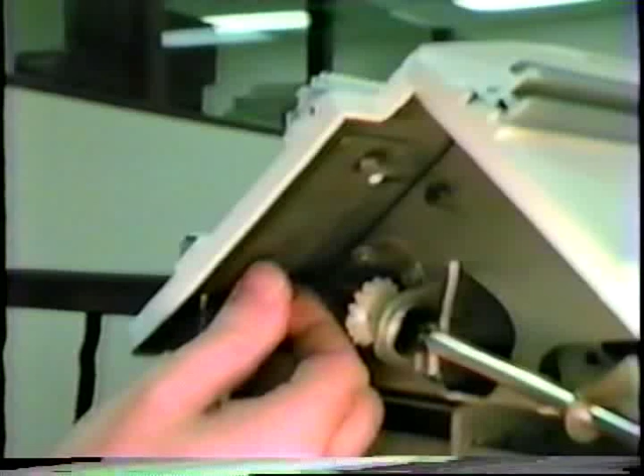Screw the knurled nut in place. This is the same type of nut used as with the 4-color changer. Only tighten this up to the outer edge. It will not tighten to the shoulder, as was the case with the 4-color changer.

Now tighten the upper knurled nut, the small one. Be very careful here. Make this firm but not too tight. Be very careful not to twist off the bolt underneath.

Place the Electra on the 2 angular brackets on the stand, slide sideways. These are your openings for fitting on the angular bracket.

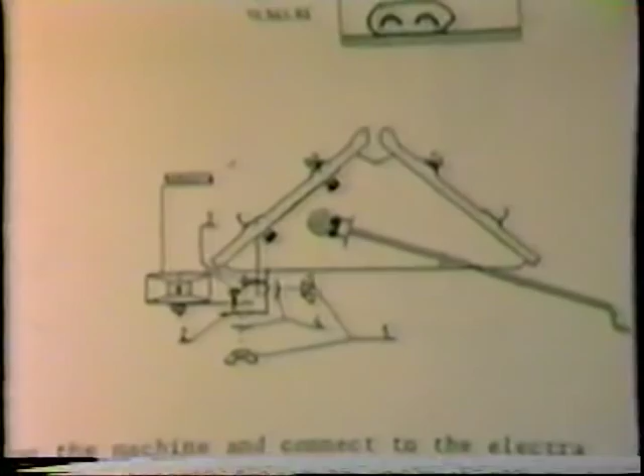We now want to fasten the racking angle bracket, shown here as number 2. Also notice the washers, shown as number 4. It's very important they go on in the angle shown in the drawing.

The racking angle fits into place. Be sure that it's secure. Then slide the screws down through.

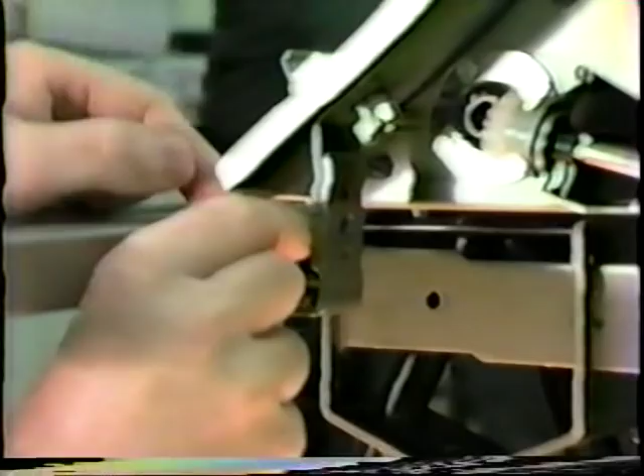Now do the same thing up above. We slide in the screw. We put the washer in place. We now add the wing nut. You may want to get a pair of pliers and make sure these are absolutely tight.

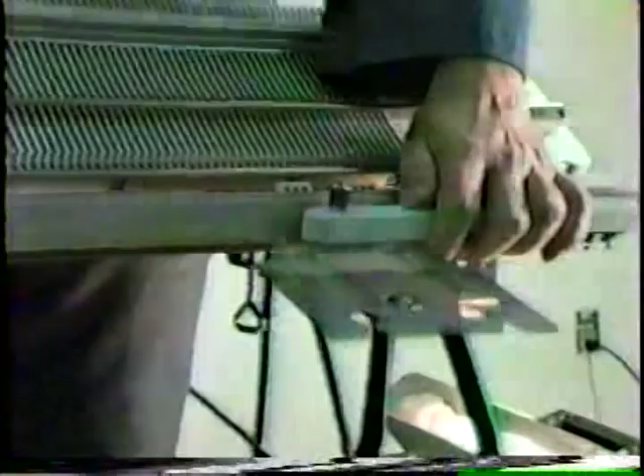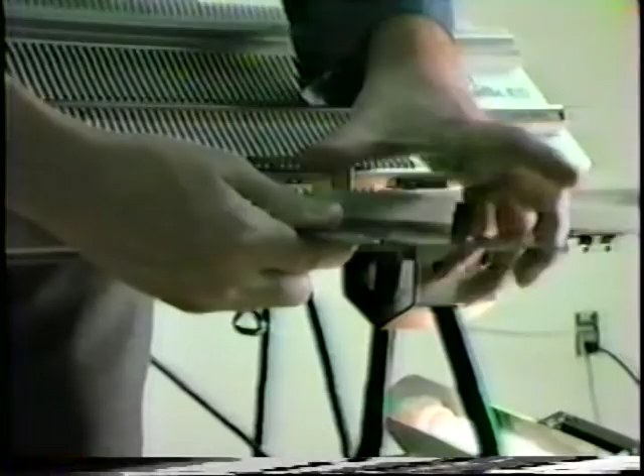We are now ready to fit the support for the mast onto the Electra 3000. Put the special hexagon screw through the spacing bush and loosely fasten with a wing nut. Then we're going to push the upper part of the hexagon screw through a hole on the underside of the main carrier rail, and we're going to slide it into place.

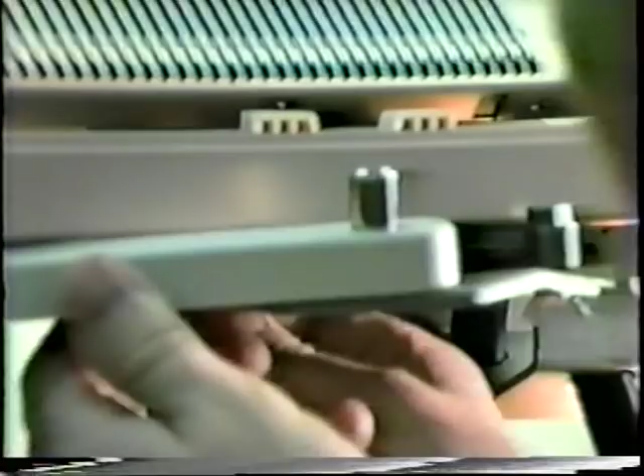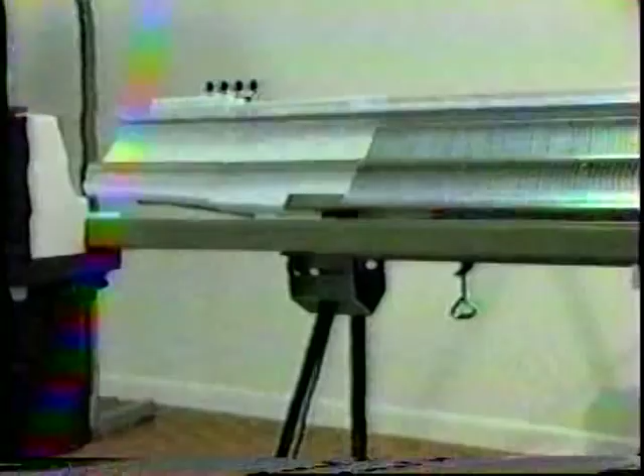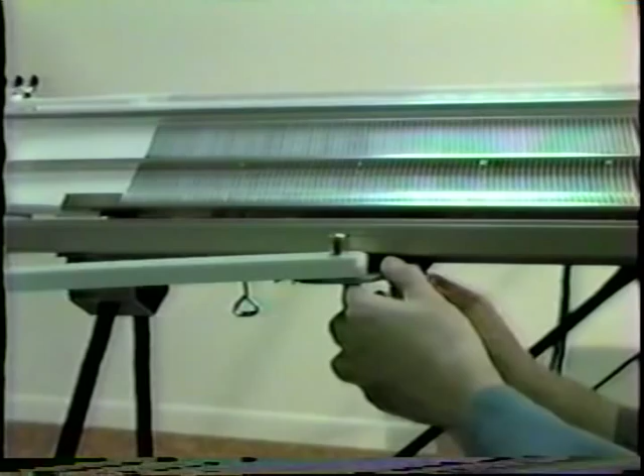Slip the head of the hexagon screw up through. The edge of the color twin support should be approximately even with the edge of the blocking rail. Now fasten it securely in place by tightening the wing nuts.

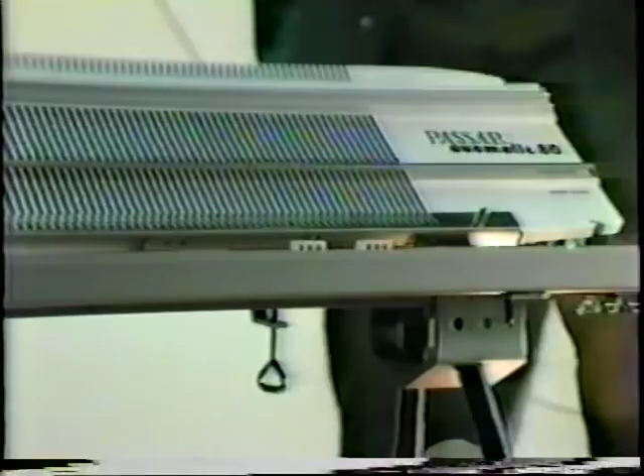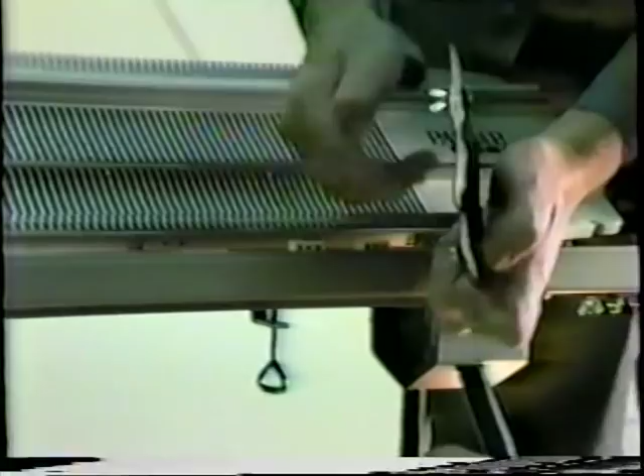Here we have the form computer support foot. Use the small hexagonal bolts for this. Slip them through, fasten the wing nuts in place, and slide the heads through the holes on the underside of the main carrier rail.

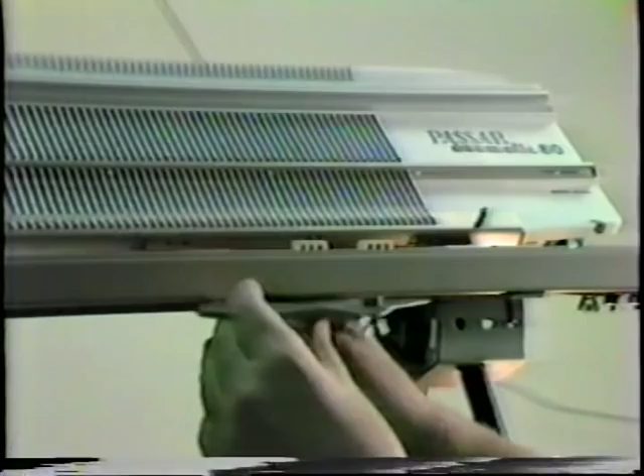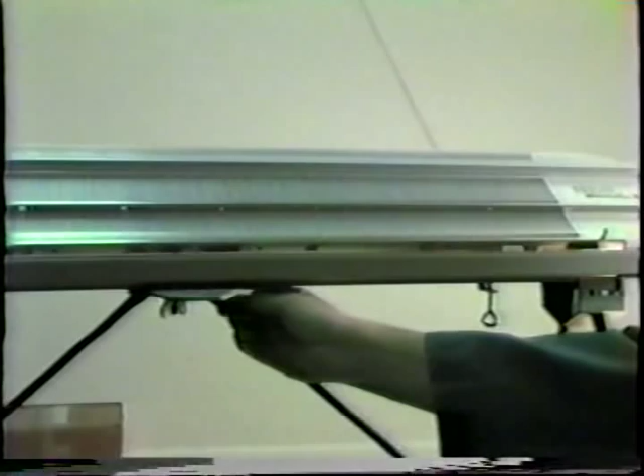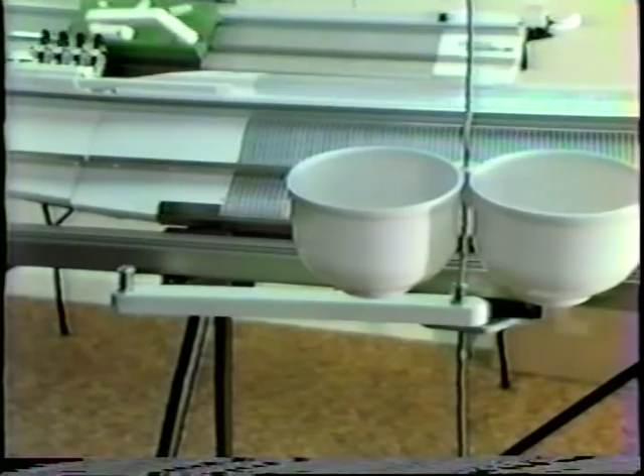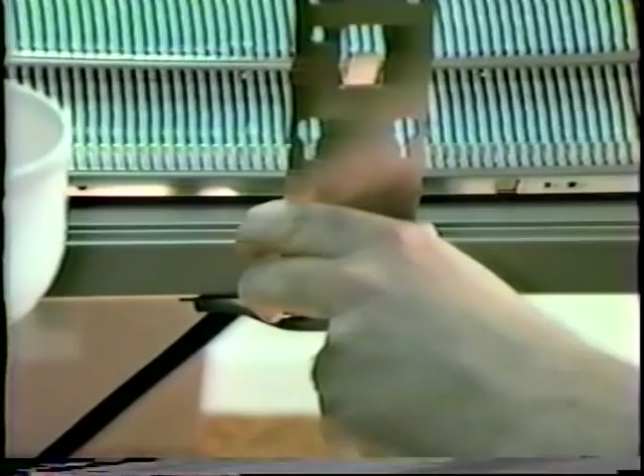Slide the support foot into place. Tighten down the wing nuts. You can position this approximately in the middle of the bed. You can put your tension masts back in. Reattach the form computer holder.

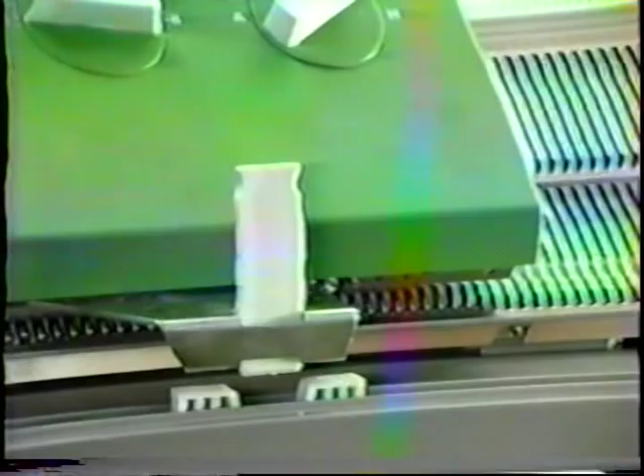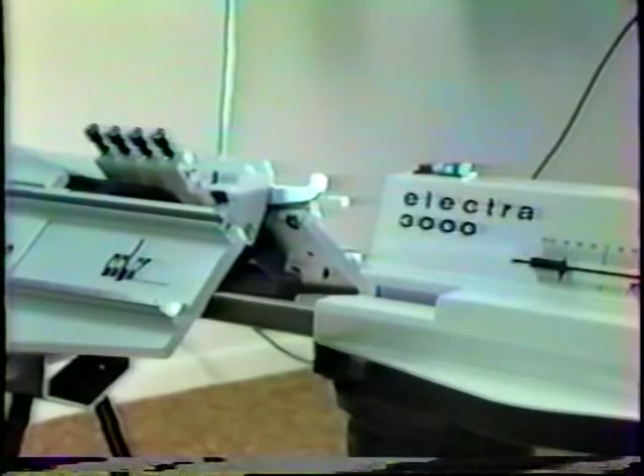When you're ready to engage the Electra, you press the slider into the clutch on the toothed belt; pull out to disengage. To put in the control bar, simply push in till it clicks into place.

This is the illustration for mounting your new form computer driver that will hold the magnet. Note that the screw and the nut are furnished with the form computer, not with the Electra. This is the same screw that was used to hold the stiffening plate that had to be removed before.

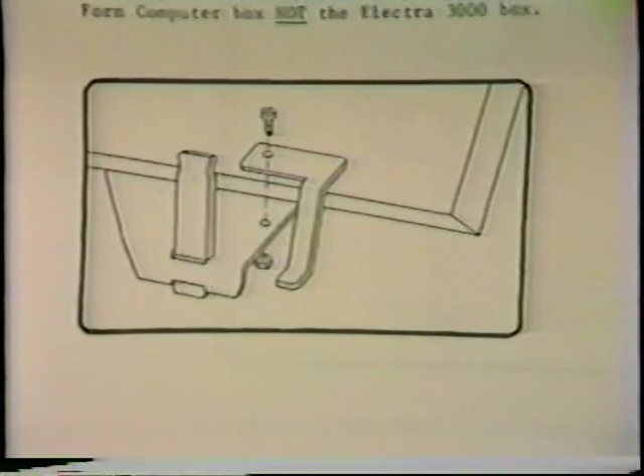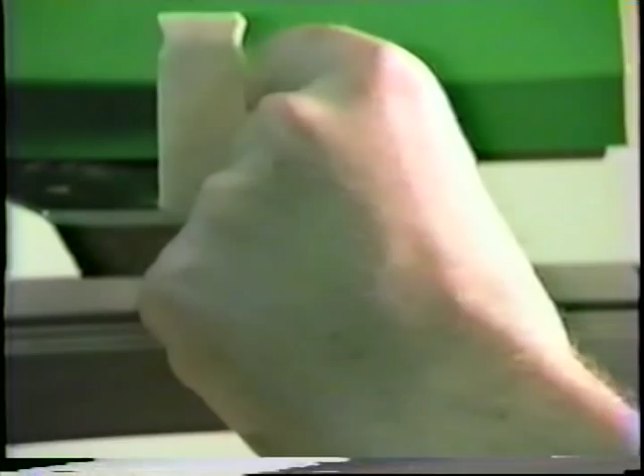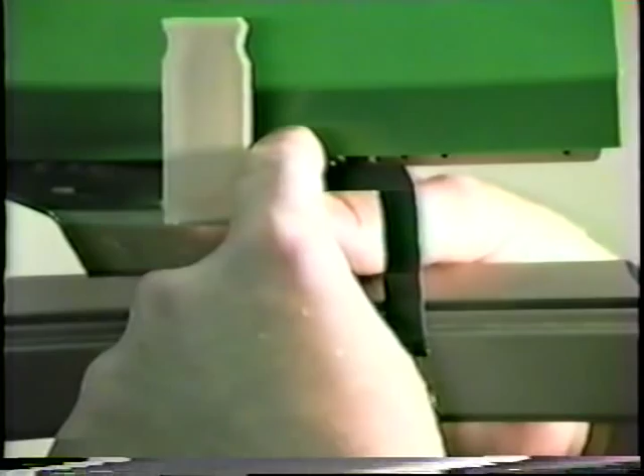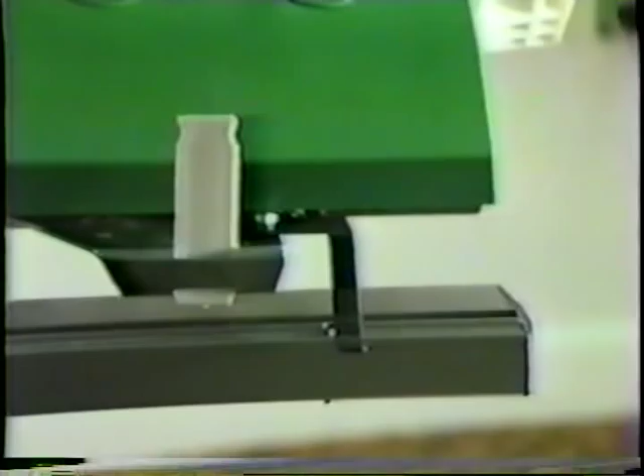Make sure that the indentations in the driver fit securely into the bracket. Push the screw down through and fasten the nut. You may need to use a wrench on the nut to hold it steady while you tighten down the screw. It may be easier for most of you to take the cam box off the beds to do this assembly. The magnet simply clicks on in place.

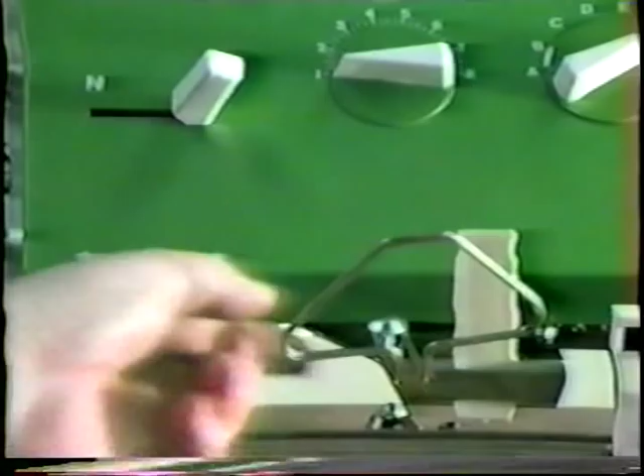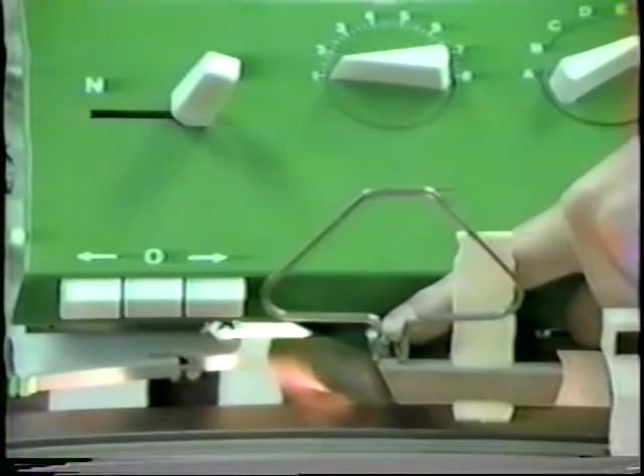This is the assembly of the trip wire to the cam box in the back. You'll be using the flat-headed screw and the spring washer and the wing nut. Before tightening the wing nut, pull the trip wire toward you. Pull it to the stop of the two slits in the driver for the cam box. You may also want to take the cam box off the beds to do this assembly.

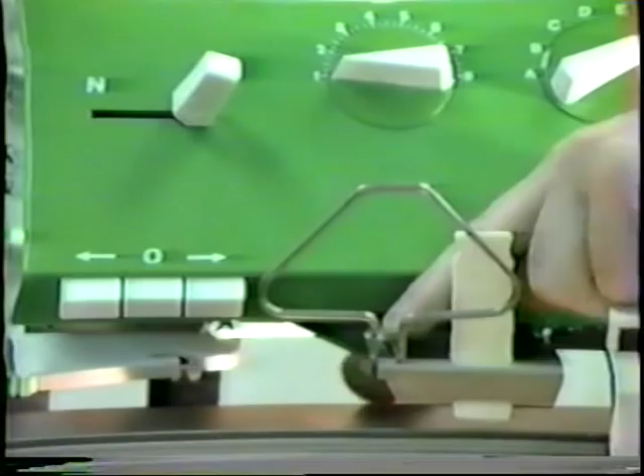This is the support foot for the counter for accessory 2. Assemble the support foot to the Electra with the two special hexagon screws and the two wing nuts. Make sure that the supporting foot is positioned approximately in the middle of your knitting machine. Unless the form computer is in your way; in that case, it will just have to sit next to it.

Unscrew the two knurled nuts on the counter for accessory 2, insert the counter into the support foot, and screw on with the two knurled nuts. Fasten the knurled nuts with the screwdriver.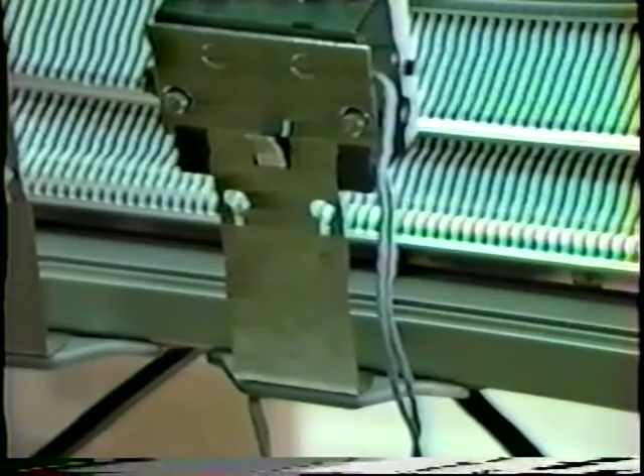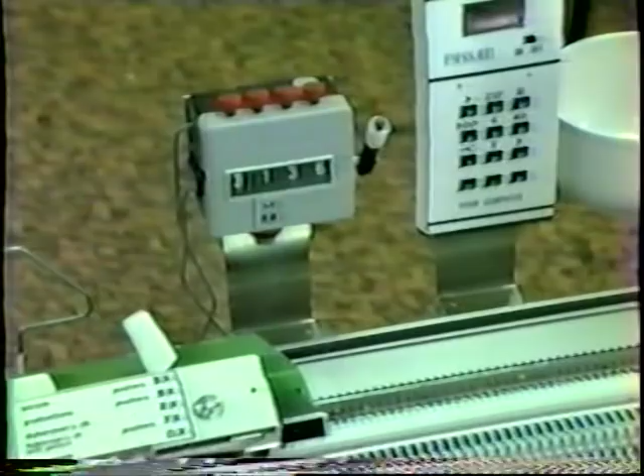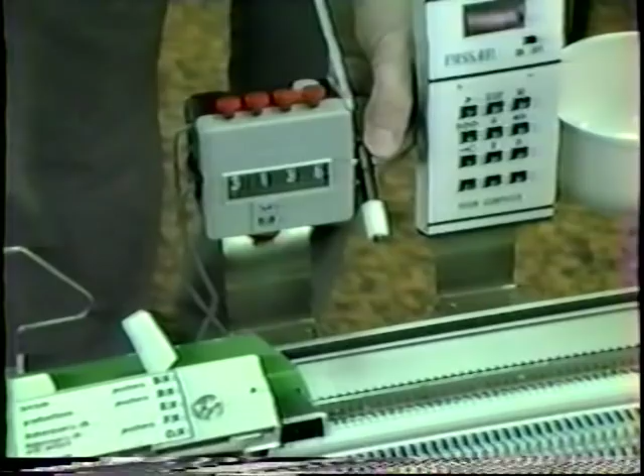Adjusting the counter lever. Take a screwdriver, loosen the back of it. Lower it to approximately the point you think it needs to be at. Tighten the screw in the back.

Run the cam box back and forth. The trip wire should lift it high enough to advance the numbers in the display, but should not put undue pressure on the counter and force it to push back extremely hard.

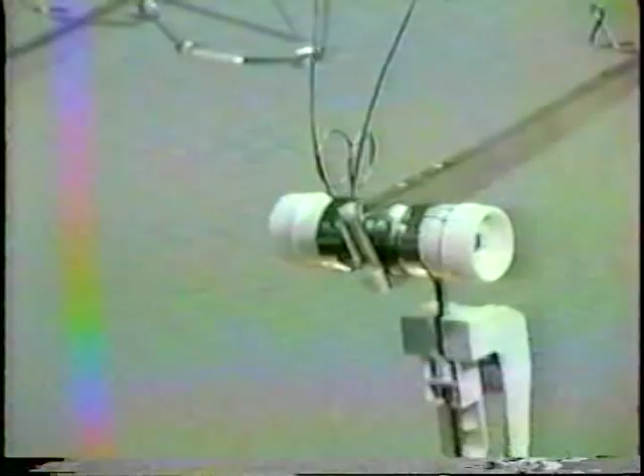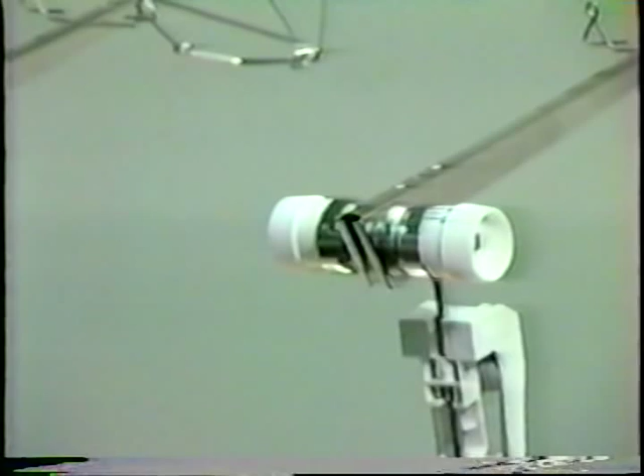Notice the white holder of the tension arm. If this does not have holes in it, we need to put in one that does. Here you see the difference. The one on the right, I've outlined the holes in black. This is a new one. The one on the left has no holes in it, and it would need to be replaced so it was like the one on the right.

Simply push down and it will snap off. Take the new one and you can use the table for leverage. Push down onto the antenna. Do both sides. Make sure it's secure.

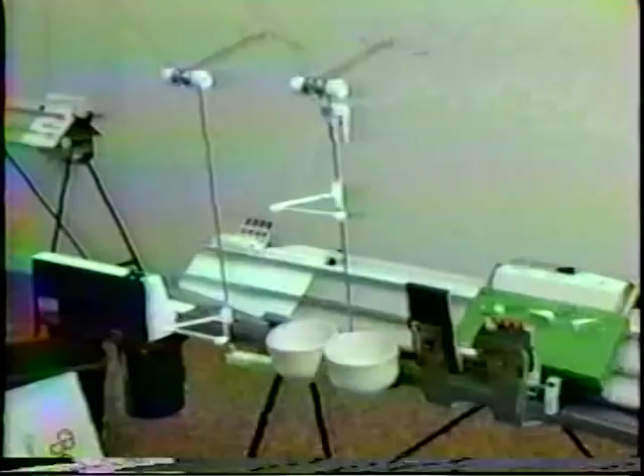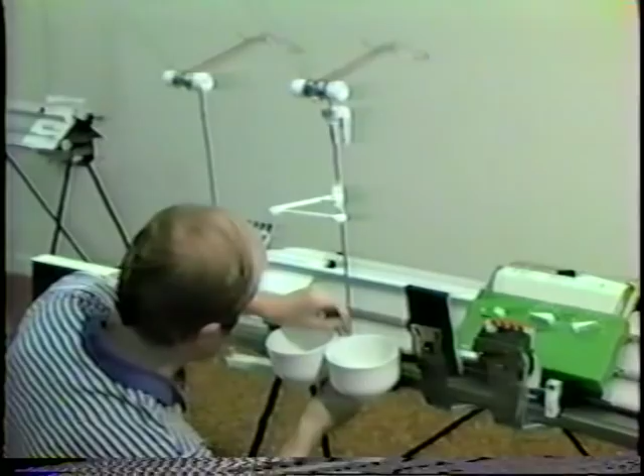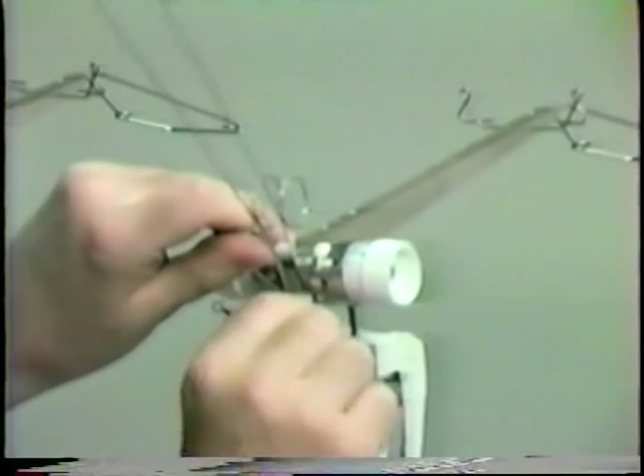Run the end of the connecting cable up through the yarn bucket support. Pull it up through the opening in the yarn guide. We are now going to fasten the shorter wire of the connecting cable in the lower hole. Do this in the following order. First, the contact strap, then the shorter cable, then the washer, and then the lens head sheet metal screw.

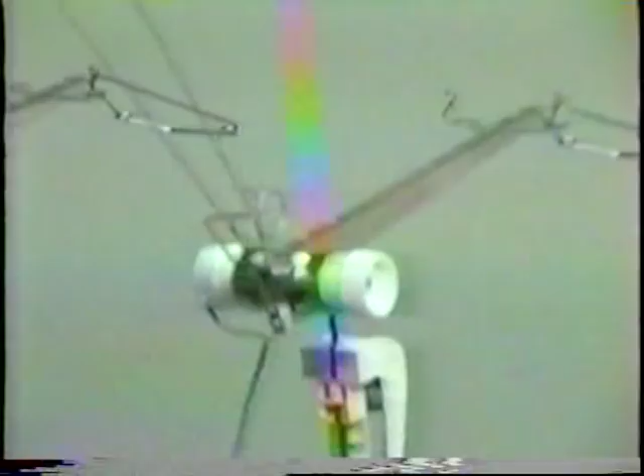Now we'll fasten the longer cable in the upper hole in the following order. The longer cable, then the washer, and then the screw.

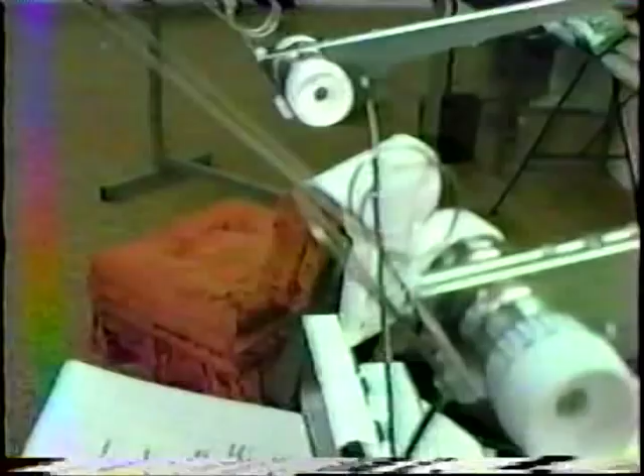Bend the contact strap back so that you have the distance of 3 to 5 millimeters between the tension arm and the contact strap. Here you see it better from another angle. To help keep the connecting cable from getting entangled with the yarn, and also to keep the contacts of the connecting cable from breaking off, it's advisable to take a piece of tape and tape the connecting cable to this part of the mast.

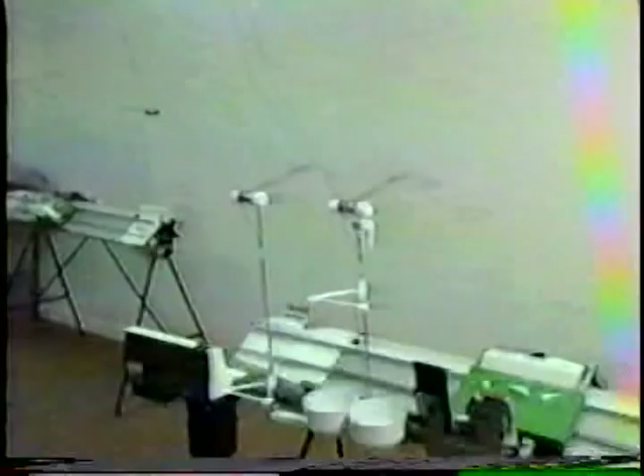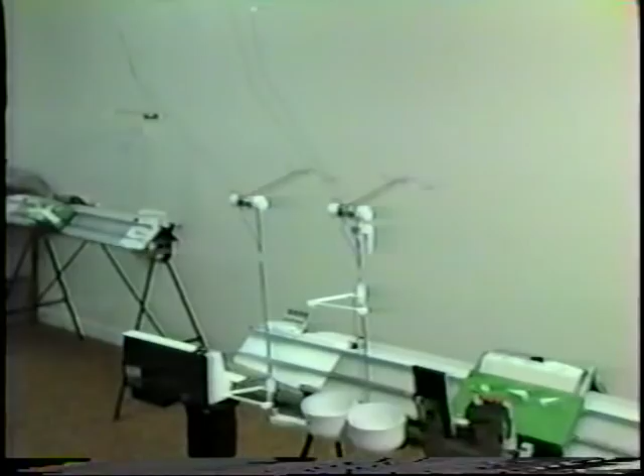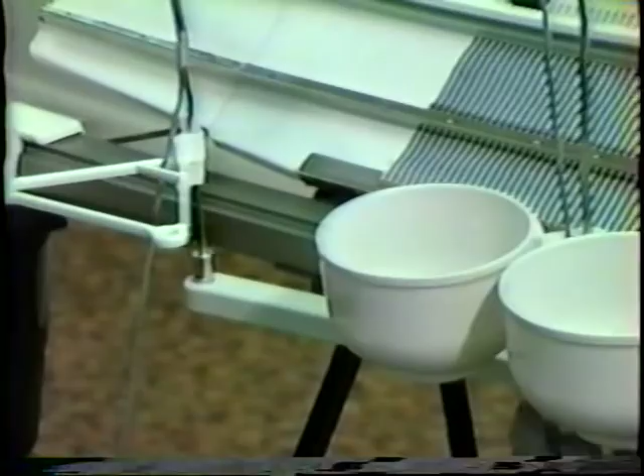You have 3 cable clips to hook the wires out of the way on the underside of the main guide rail. Just simply slip it into the notch underneath and clip them into place. Here you see an underside view of the cable clips and how they can clip the wires in place.

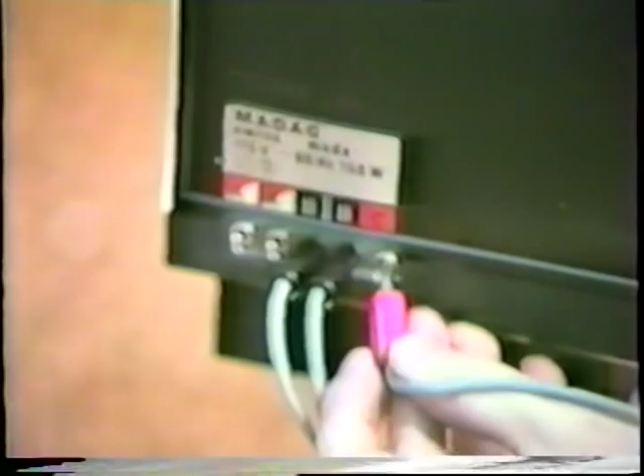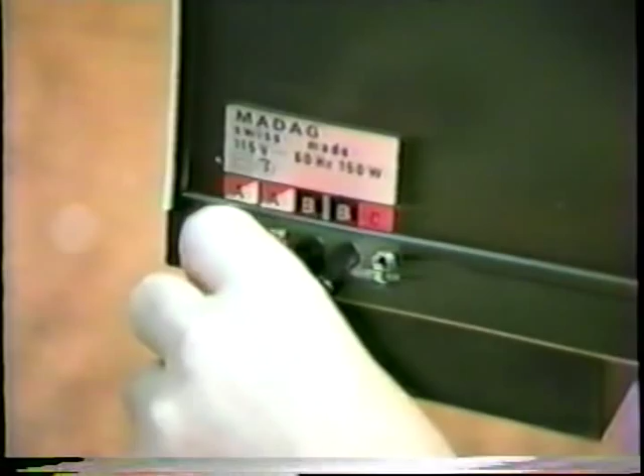The black plugs will fit into the B slot. The red you can put in the C. The gray will fit in the A. Depending on what application you want to use with the accessory counter, you can put the red in the A slot also.

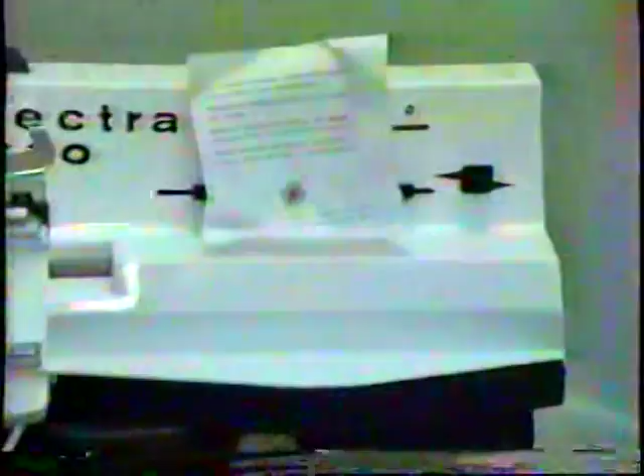Here's how you plug the foot pedal into the back of the Electra. Remember, your foot pedal is not a speed control. Before operating, always remember to remove the transport screw. Save this transport screw. Also give it to the customer who buys the Electra so they'll have it the next time they move it.

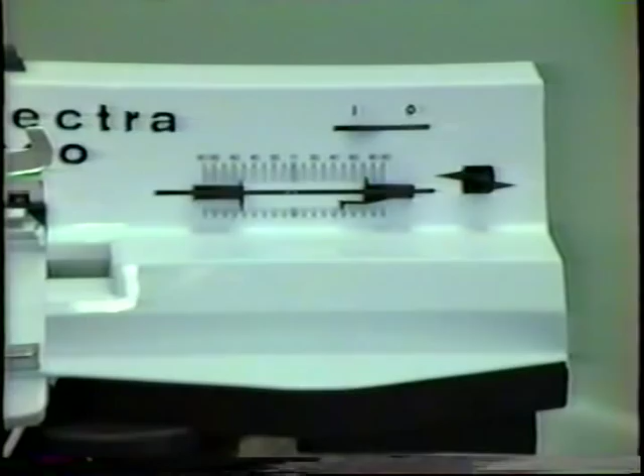One more time, you must have a Color 80 4-color changer in order to use the Electra 3000. Sometime in the future, there will be new mounting brackets for the Electra 3000. Right now we'd like to point out some of the new modifications that will be taking place so that you'll be aware of these when this happens.

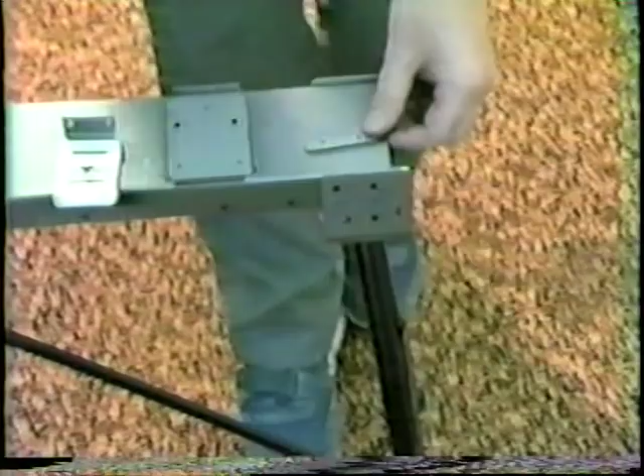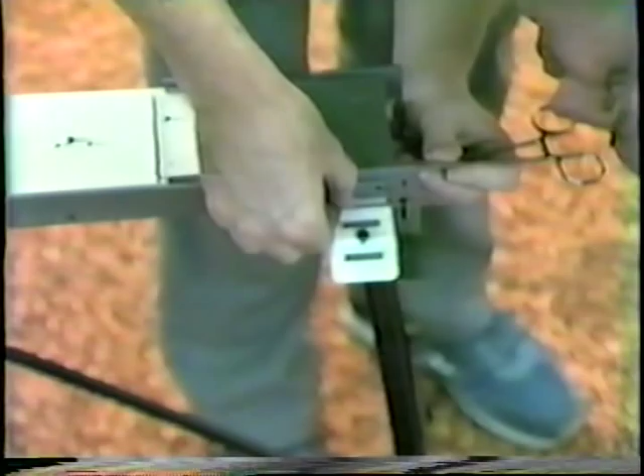The first change is the angular bracket that attaches to the stand. You will also have a fixing plate that slides into the stand. This time you'll be using 2 cylinder screws with a spring washer on each one to fit this angular bracket into place.

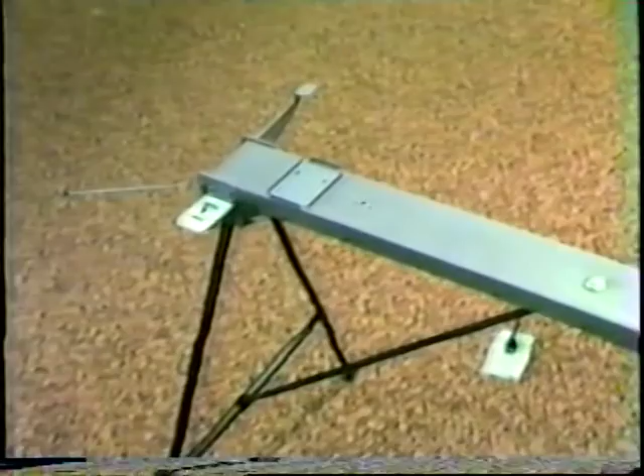Rather than the old mounting brackets on the extreme left-hand side, you will have a new racking plate. It will screw onto this part of the back bed in this position right here.

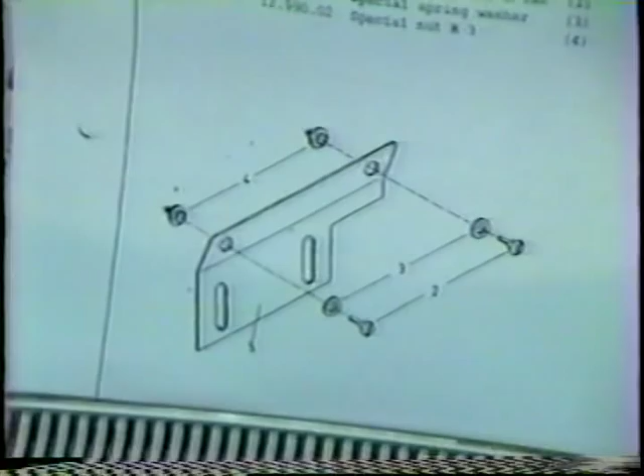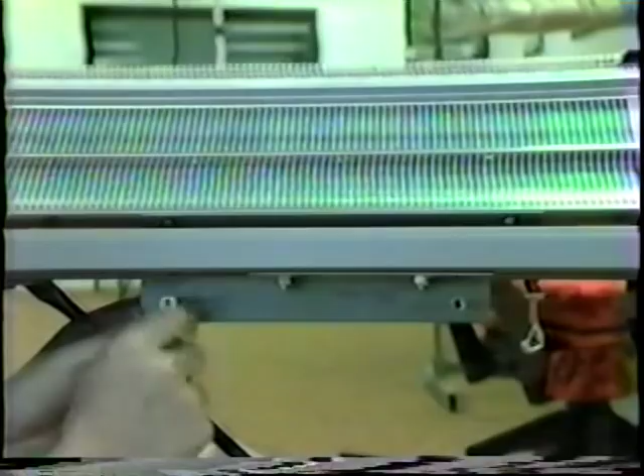Set the motor in place, align the racking plate of the back bed with the racking angle on the main carrier rail. Run a cylinder screw and a washer through from the other side. Put the spring washer on the screw on the side we're looking at here, and put on the hexagon nut. The screw and the washer from the other side. We put on the spring washer. Now the hexagon nut.

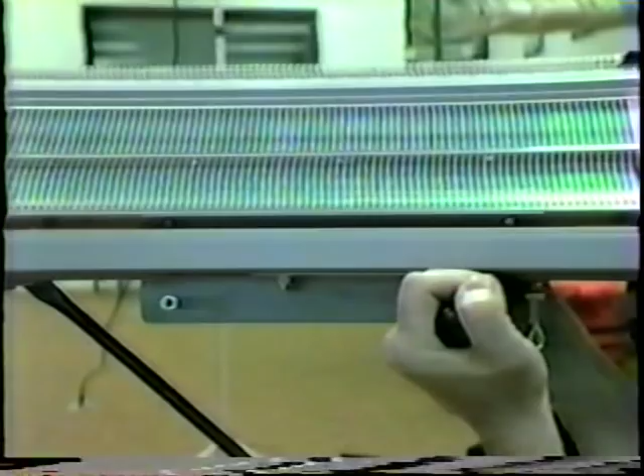We'll hold the screw in place with a screwdriver. Take a 10 millimeter socket driver, tighten it down, the same on the other side. Now tighten the nuts on the underside of the main carrier rail. This will hold the racking angle in place now.

Also notice that the special hexagonal bolts that fasten down the support for the mast, and also the special hexagonal bolts that fasten down the support feet for the farm computer and the accessory counter, are already screwed in place underneath the main carrier rail. Here we're positioning the support for the mast.